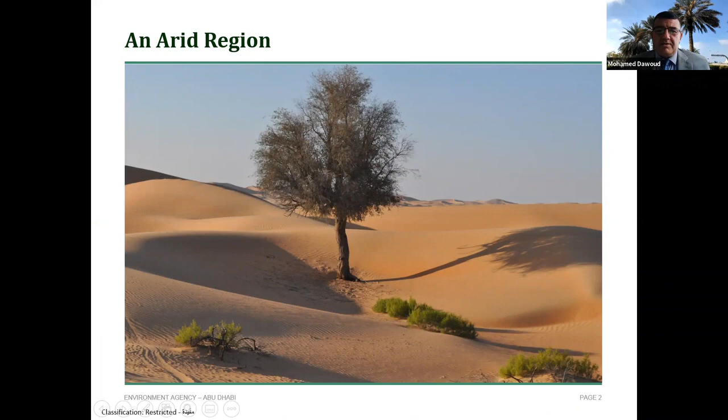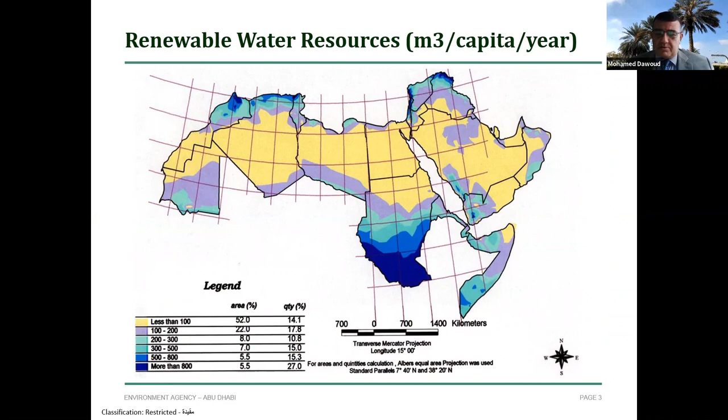My presentation today will be about the sustainable management and reuse of treated wastewater in the Arab region. Our region is an arid region, and we don't have a lot of water resources, and the renewable water resources per capita in our region are mostly very negligible, and in some countries less than 1,000 cubic meters, which is the poverty line for water resources. The rainfall is mostly negligible except some in the south of Sudan and some minor frequencies on the northern coast of the Mediterranean Sea or the Red Sea.

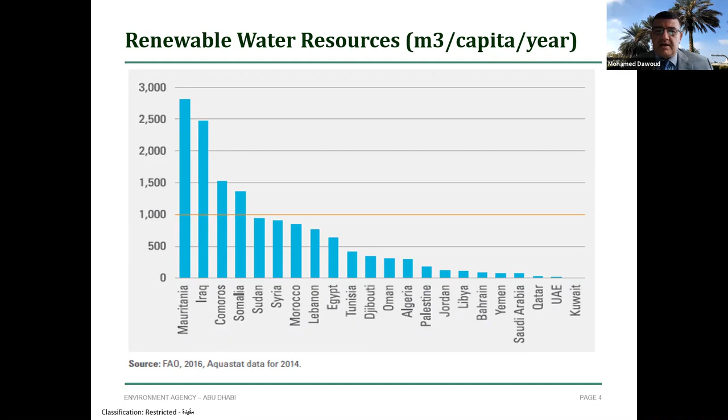At present, most of the countries are lying below the poverty line, which is 1,000 cubic meters of renewable water resources per capita per year, except 2 or 3 countries, mainly Mauritania, Iraq, and Somalia. The remaining countries are below, and especially the GCC countries are far below. They are less than even 100 cubic meters per capita, which makes the situation very stressed regarding the availability of renewable water resources in the region.

This also makes it challenging to get enough food to fill the gap between the existing food and the food imported from outside the country. Most of the countries are importing food from outside the region, and in some countries the self-sufficiency ratio for food is less than 15%, which means that 85% of the food is coming from outside the region. And to produce this food within our region means a lot of pressure on the non-renewable resources which we have.

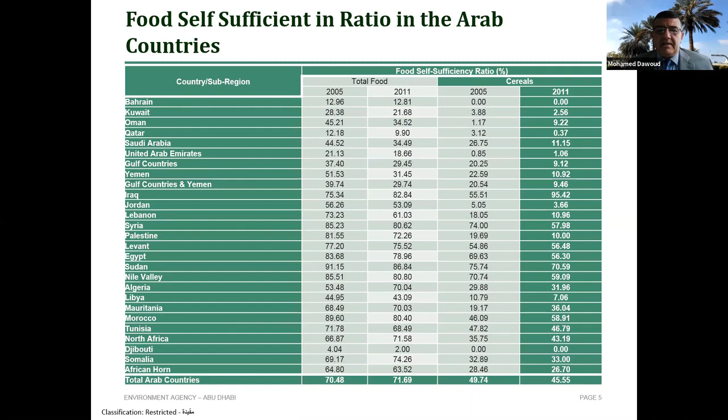At present, all over the world, they started to look at what we call non-conventional water resources, meaning desalinated water or treated wastewater. Our region actually produces about 2/3 of the total desalination capacity all over the world. But desalination is always very expensive, and it needs a lot of energy to produce fresh water from seawater or brackish water. It also has a lot of environmental impact, like brine water discharge to the Gulf and the Red Sea. It needs a lot of caution, and it is very costly regarding affordability, especially for the low-income countries in the Arab region.

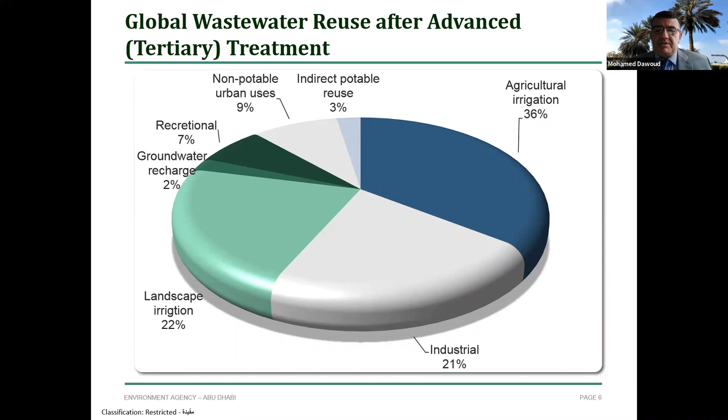So most of the region started to look at using treated wastewater, which is a little bit cheap, it's available, and it increases with time. At present, the region is producing about 8 billion cubic meters, or recent statistics indicate about 12 billion cubic meters of treated wastewater. If this wastewater has been treated carefully and the quality managed carefully, then this water can be used for different uses: agricultural irrigation, aquifer recharge, district cooling, irrigation of landscaping, amenity plantation, forested areas, and many other purposes.

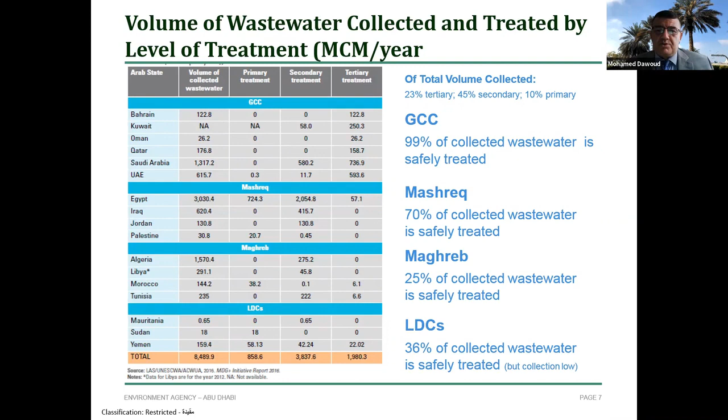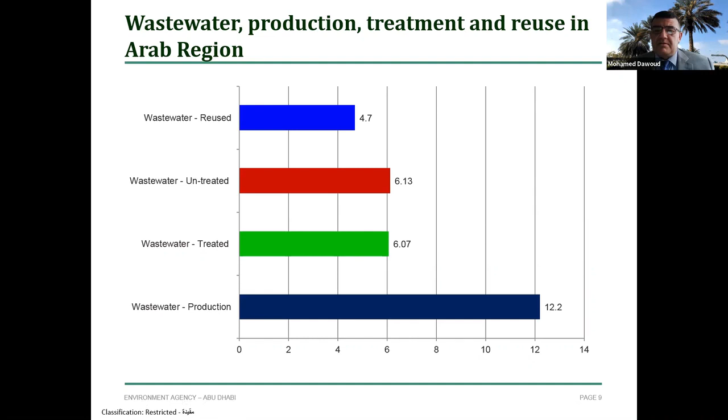As I mentioned, at present we are producing about 12 billion cubic meters. About 6 billion are treated, 6 billion are not treated, but only 4.7 are reused. The remaining, about 8 billion cubic meters, are discharged back to the environment with many environmental impacts and challenges. By modeling and predicting these volumes, by 2030 the total treated wastewater production will reach about 30 billion cubic meters a year. This is a huge amount of water, and if we are not ready to utilize it, it will be discharged back to the environment or to the water courses.

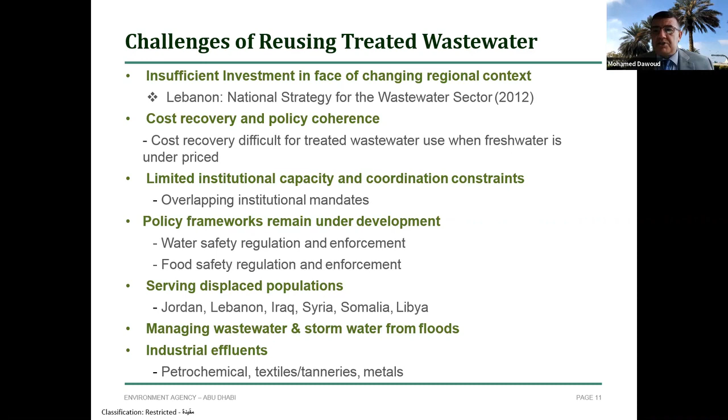There are, of course, a lot of challenges regarding the reuse of treated wastewater, especially insufficient investment and the lack of financial resources, which is a very important issue, as well as cost recovery and policy coherence. We also have limited institutional capacity to use this treated wastewater, and there are no policy frameworks in most countries regarding reusing treated wastewater. Also, we are not managing wastewater and stormwater from floods, and industrial effluent is sometimes added to the domestic water collection, which adds a lot of additional pollution that is not normally treated even by normal treatment plants.

I will give here a very good example from Abu Dhabi Emirate as a case study, which could be followed by other countries or by other states in the region. In Abu Dhabi Emirate, we have three main resources. The first one is the groundwater, which contributes about 60%, and we have the desalinated water, and we are producing about 1.8 billion cubic meters in UAE in general and Abu Dhabi.

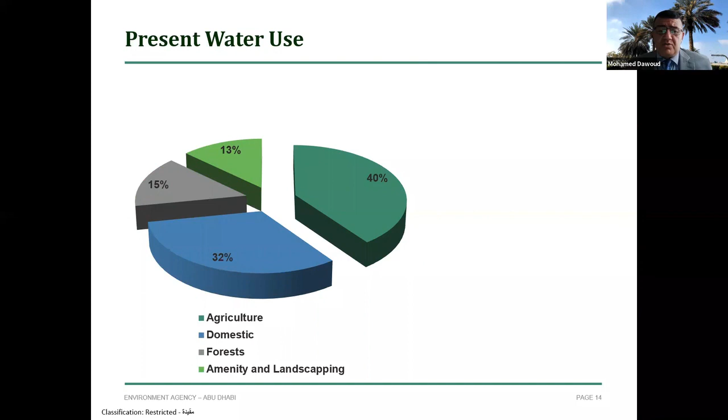And we are also using the treated wastewater. At present, this is used either for agriculture, domestic, afforested areas, amenity plantation, and other purposes. In Abu Dhabi Emirate, we have more than 32 treatment plants. Out of them, only 2 are big, and the remaining are small scale treatment plants. With these, we are producing about 400 million cubic meters of treated wastewater.

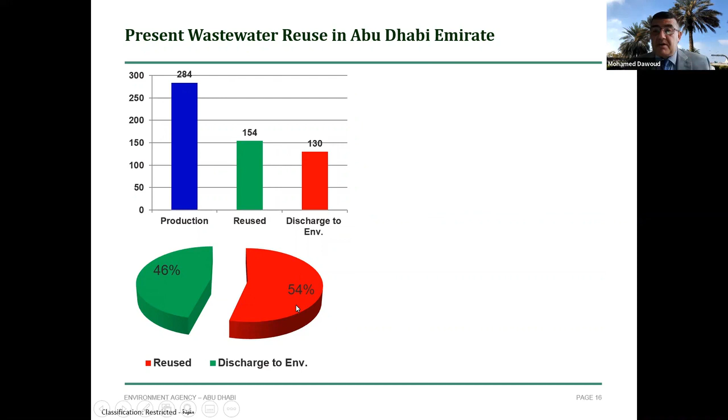Out of them, only 45% is reused, and the remaining 55% is discharged back, mainly to the South Al Musaffa area in the Arabian Gulf. So it has polluted this area and is making a lot of environmental challenges for our marine ecosystem, especially since this area is mostly a closed system and the ambient marine water is not circulated in a proper way, so it makes a lot of environmental challenges for us.

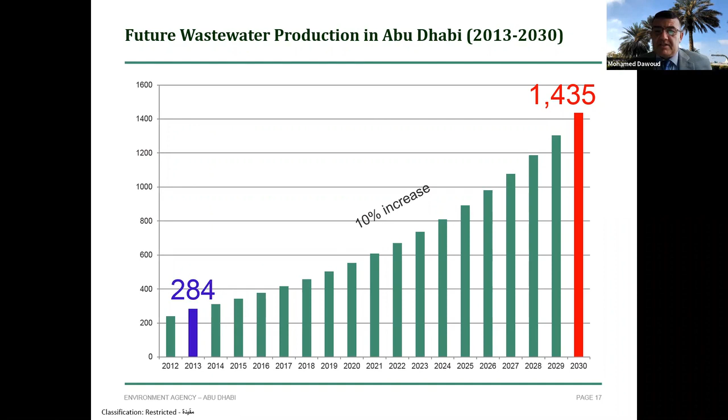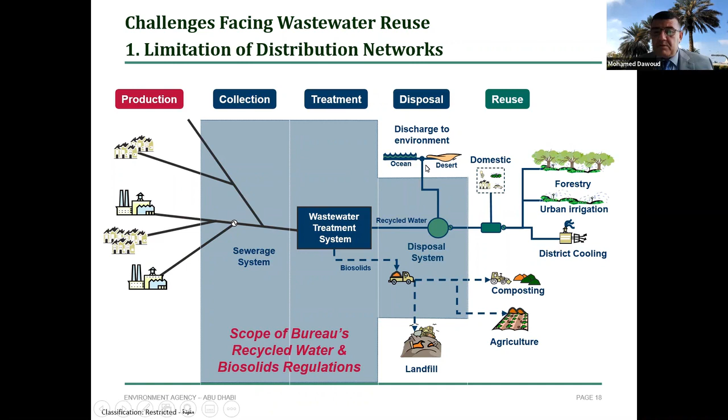Our expectation is that this will continuously increase by 8 to 10%, so it could reach more than 1 billion cubic meters by 2030. So we started to put a plan to utilize this water. This is the schematic diagram of the production, the collection, the treatment, and then the disposal to the environment. And if it's not disposed, some of it is at present utilized.

The present utilization in Abu Dhabi Emirate is for agriculture, for some crops, especially fodder crops, and also some olive trees, peaches, and some oranges. But most of this water is not used for agriculture. I'm speaking here about the 45%. Most of it is used for landscaping, amenity plantation, road verges, and not directly for continuous use in agriculture. But there is a plan now to utilize this.

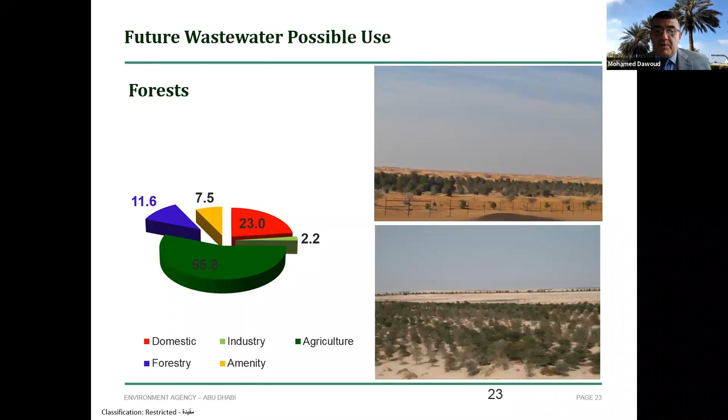Also, we have a very good experiment to advancedly treat this water and reuse it for agriculture in 230 farms. So we are planning now to increase the reuse of treated wastewater in agriculture, and we started to plan for 2 mega projects. We call the first one the Dubai Road Project. We will pump the water from the end of Abu Dhabi Island with a pipeline with a length of about 45 kilometers.

This will carry about 140,000 cubic meters a day, and the water will be used for the irrigation of farms and forests. We have here more than 2,100 farms which at present are using desalinated water. All these farms and forests along this pipeline are irrigated with desalinated water, and 1 cubic meter of desalinated water costs the government something like 11 dirham, which is more than $2 for each cubic meter.

So by using this amount of water, I will save about 140,000 cubic meters of desalinated water, a very big cost for the government. The estimated cost for the infrastructure of this pipeline is about 180 million Emirati dirham, and the construction will be completed by the end of 2021. We will be ready to irrigate 2,100 farms, in addition to some afforested areas, landscaping, and amenity plantation along this pipeline, and we will save this huge amount of desalinated water daily from farm use in this area.

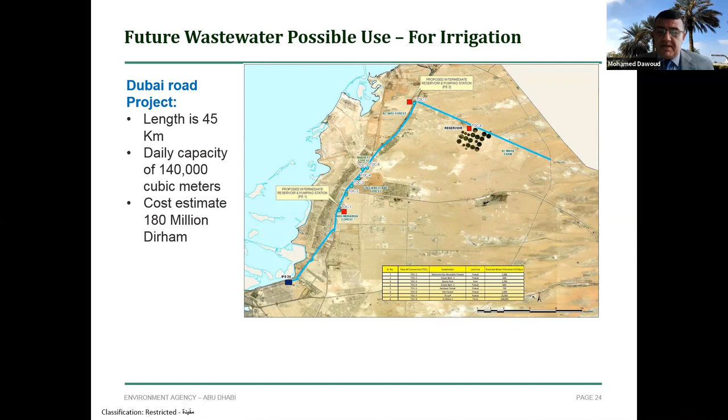The second mega project is what we call the Al-Ain Road project, and the water will be pumped from Al-Wathba treatment plants along Al-Ain Road up to Al-Khatma and Al-Khazna, and it will supply about 2,400 farms, in addition to some afforested areas and the Al-Ain road verge along this line. The length of this line is 70 kilometers, the daily capacity is 250,000 cubic meters a day, and the capital cost is 750 million. All of these farms and afforested areas along this pipeline are irrigated with groundwater.

Unfortunately, because the groundwater aquifer within this area is a non-renewable aquifer system, we are deteriorating the groundwater, and it is depleted. The table is falling every year by 6 and sometimes 7 meters. So we are facing very big challenges if we continue using only the groundwater. Replacing the groundwater in this area with treated wastewater will enhance the situation of the aquifer system and relieve the pressure from continuously using the deteriorated groundwater.

Most of these 2,400 farms, as I mentioned, are non-operated at present because of the deterioration of the groundwater and the highly saline water in this area. So by pumping this 250,000 cubic meters of treated wastewater, I am actually replenishing the aquifer, preserving the investment in these farms, and also helping to recover and enhance the situation in the future.

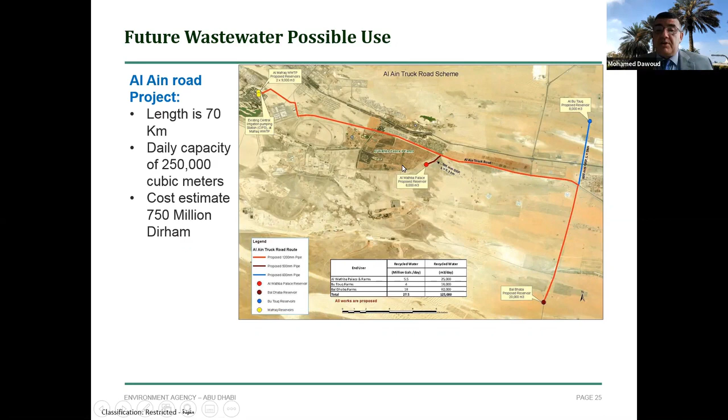Within this area, we will save something like about 4,000 groundwater wells, and it will save a huge amount of operational cost for the owner of these farms. When we speak about this, we have a lot of workshops and sessions and brainstorm sessions with the owners of the farms: how they can use the treated wastewater, which irrigation methods they should use, what criteria they should take into consideration, what will be if they would like to use available alternative resources for potable supply and the livestock potable water supply.

So we started to have another potable water supply from the network, from the desalination network, and also we will keep one groundwater well as a backup for any emergency, and we will also advise them how they can carefully select the irrigation technology and the irrigation method to take into consideration any health risk or to protect the soil and the groundwater from the salinity and toxicity hazards.

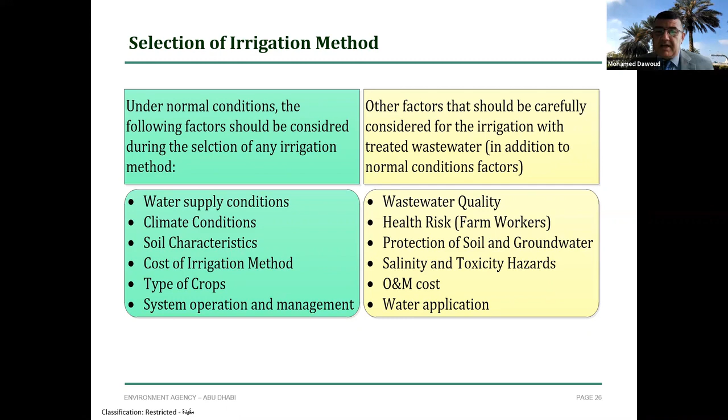Is agriculture the only use in Abu Dhabi Emirate? And the answer, of course, is no. Agriculture is one of the main demand centers that can utilize the treated wastewater. But we have other alternatives like the urban use, as I mentioned, for landscaping, the recreational use. We have many fountains and artificial lakes now, which use the treated wastewater.

We also use it for environmental enhancement. For the groundwater, we are planning to use it also, and for industrial use like district cooling, and outdoor industrial use for landscaping or greening, but not in the industrial process itself. And also for potable water use, if we use membrane technology. But our feasibility study indicated that adding membrane technology will add additional cost, and we will have brine water discharged back to the environment as rejected water produced by the membrane technology. And we will also need additional energy, so it will be costly.

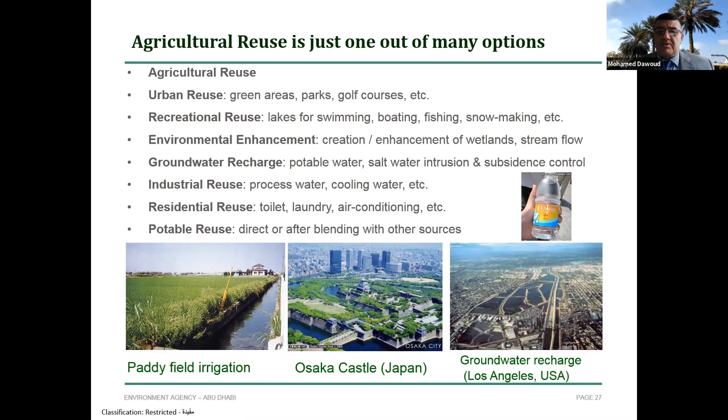So it is better to use the tertiary treated wastewater directly for irrigation, for district cooling, for aquifer recharge, or whatever. Before starting this project, there was a proposal to recharge the whole quantities of water directly to the aquifer. But our detailed feasibility and technical study indicated that it is not technically and economically viable, and it's better to use it directly for irrigation. And if we have excess water which is not utilized for irrigation, it could be used for recharging the aquifer. But recharging the whole quantities into the aquifer is not the right solution technically and economically.

Why? Because the aquifer system here, as you see, in the coastline, is mostly brackish water, and the volume produced near Abu Dhabi Island or Al Ain actually lies above the aquifer, which is mostly brackish or saline water. So adding additional treated wastewater to this will not enhance the situation. So it's better to use it directly. And if we need to recharge the aquifer outside this region, it will be very costly to build the infrastructure and pumping stations to the aquifer which is suitable for recharge.

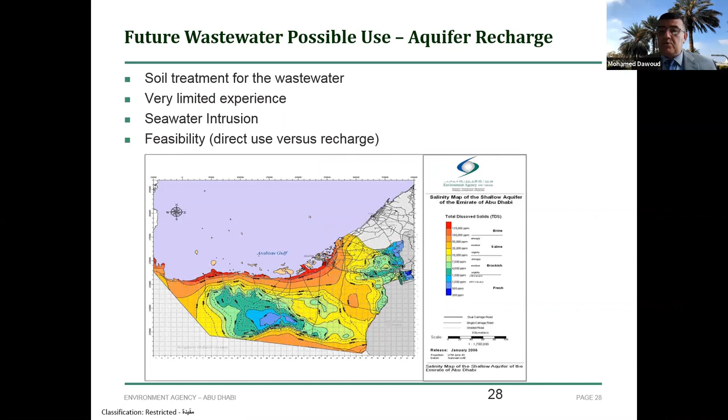So we started to build the infrastructure to utilize it directly for irrigation. And if we have excess, we will enhance locally the areas under these farms by recharging the aquifer system within the farms. So feasibility-wise, we find that it will be better to use it directly for irrigation and not for aquifer recharge. However, if you have excess water, you can use it for enhancing the groundwater aquifers locally. And if you would like to recharge, you need a lot of infrastructure. You have to build the pumping stations, the main transmission pipelines, the recharge system, the abstraction or recovery system, and the monitoring system.

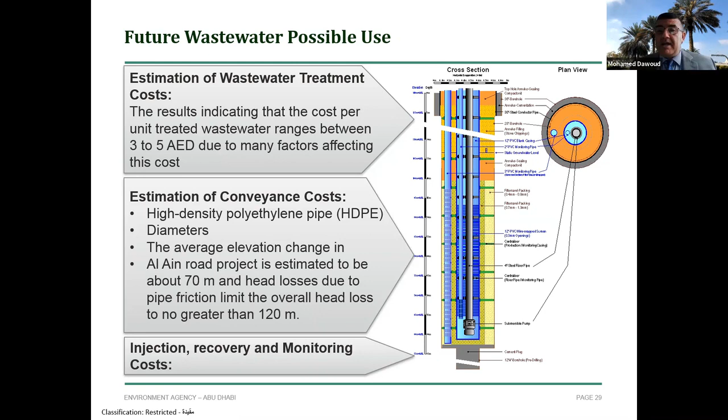All this will be very costly, and you also need very comprehensive monitoring to evaluate the recharged water in 3 dimensions, horizontally and vertically, and also its quality and how it will interact with the native groundwater within the aquifer system. So these items will add a hell of a cost for the end users.

Actually, the advantages of using the treated wastewater are many. It is a reliable source of supply, and it continuously increases with the increasing population and the increasing demand for potable and domestic water supply. It is available near agricultural applications because it's produced from the urban areas. It has a high content of nutrients, of course, like nitrate and phosphorus, which is very good to enhance the growth of the plantation.

We are benefiting from the rural population if we collect the wastewater and treat it and reuse it. We have the experience within the region how we can deal with the treated wastewater, how we can transport it, and how we can utilize it, how we can use it. Actually, we also have the guidelines and the standards, and we carried out in Abu Dhabi Emirate a very comprehensive study jointly with FAO to evaluate and put a monitoring plan for the reuse of treated wastewater in agriculture in Abu Dhabi.

Of course, there will always be some necessary considerations and concerns which should be tackled very carefully before going for the use of treated water. The most important one is the risk to human health, especially the farmer or the end user who deals with this type of water at farm level. The risk to the environment, like if it contains heavy metals or any pollutants which could affect the groundwater or the soil within this area.

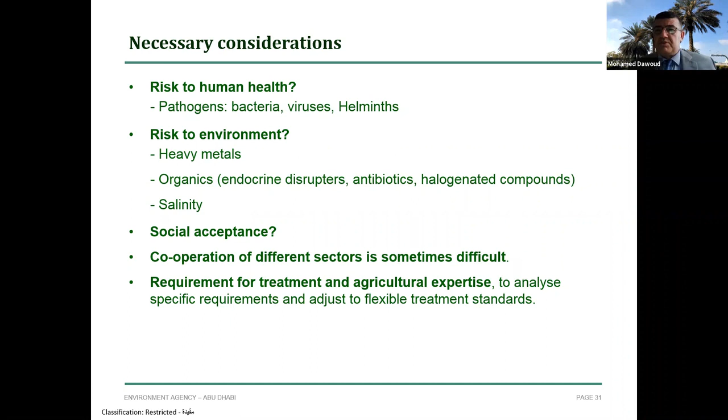Also, sometimes additional treatment is required, but fortunately in Abu Dhabi, the 32 treatment plants are all treated up to tertiary level. So the quality, according to the FAO study and the FAO guidelines and standards, is suitable for most crops except some edible crops, for which it's not recommended to directly reuse treated wastewater.

Public health should also be taken into consideration. The design of the wastewater transportation, distribution, and also the irrigation system which will be used at the end on the farm should be tackled very carefully and designed very carefully.

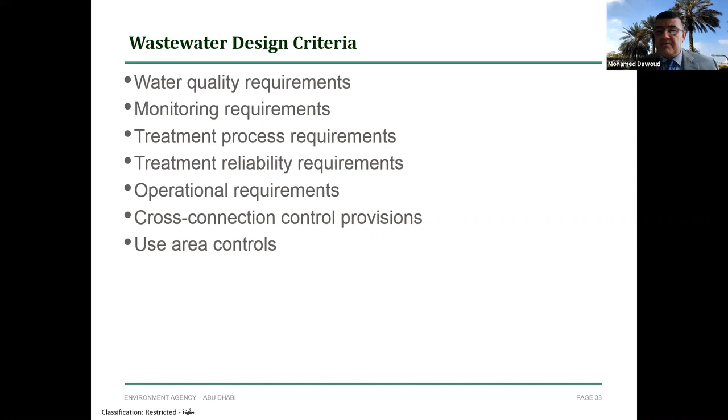In conclusion, of course, treated wastewater is considered, from my point of view, as part of our renewable resources, and we have to go ahead and discuss in detail how we can utilize it. And I gave you an example in Abu Dhabi that by the end of 2021, we will reach zero discharge to the environment, and we will utilize 100% of our treated wastewater, and it will add to our water balance in Abu Dhabi Emirate. So it has a lot of environmental sustainability. It could help to protect the groundwater. It could help as an alternative resource to desalinated water in irrigation.

So it will help the environment, and it will also help economically to save a lot of money and a lot of energy which is used for desalination, and also help the environment by stopping the discharge of this treated wastewater to the environment, either the water courses, the desert dunes or whatever. So it also has a lot of economic efficiency compared with other alternative resources.

For instance, in Abu Dhabi Emirate, we have some water resources valuation, which indicated that groundwater is costing us between 5 to 7 dirham, which is something like $1.5 per cubic meter, compared with $2 plus for desalinated water, and less than $1 or about $1 for treated wastewater. So it has some economic efficiency, and it is economically viable to use it.